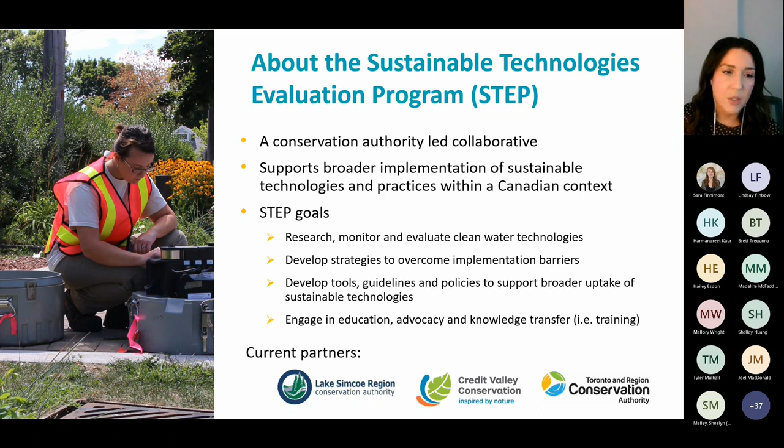We also develop tools. We have a treatment train tool for low impact development. We also have online tools like the Wiki, which is an online guide for all aspects of low impact development, design, maintenance, everything you need to know about low impact development. And we also develop guidelines and policies to support broader uptake. One of the primary things we do is education and training, knowledge transfer. So events like today are one of the primary focuses of the program, mobilizing the knowledge that we have gained through our research.

Okay, so today I'm going to be covering these key topics. I'm going to be focusing more on application of erosion sediment controls and specific topics like dewatering protocols and winter preparedness. We'll also be discussing legislation that's relevant and you need to know if you're involved in erosion sediment control or construction at all really, and designing ESC plans for construction projects.

If you're interested in more detail on the ESC fundamentals, like an overview of the erosion methods and sediment control methods and best practices, I also encourage you to check out the workshop that took place last week. I know Kawartha CA will be posting it online soon, so I can keep you posted on that and send out a notification when it is posted. But there's a full video, so if you need any of that background information and you didn't attend that session, I would encourage you to try that one as well.

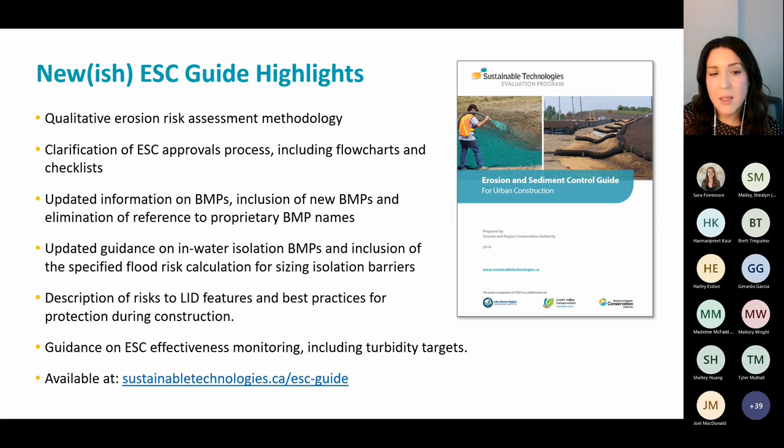Okay, so getting right in, we're going to dive into some information on pumping and dewatering best practices for construction projects. I think the important thing is that having dewatering protocols and plans in place will allow you to deal with your planned dewatering and any unforeseen dewatering activities, so that you always have a plan to mitigate sediment releases during those activities. The ESC plan should definitely include dewatering protocols that direct staff on how to handle active and passive pumping discharges.

Some of the common activities where you can anticipate needing pumping or dewatering would be sediment control pond dewatering to clean it out, or to facilitate any regrading or maintenance dredging of your sediment control ponds. On a multi-year construction project, you should definitely have to clean out your sediment control ponds at some point. It's not going to be okay to leave the sediment control pond without being cleaned for four years or whatever.

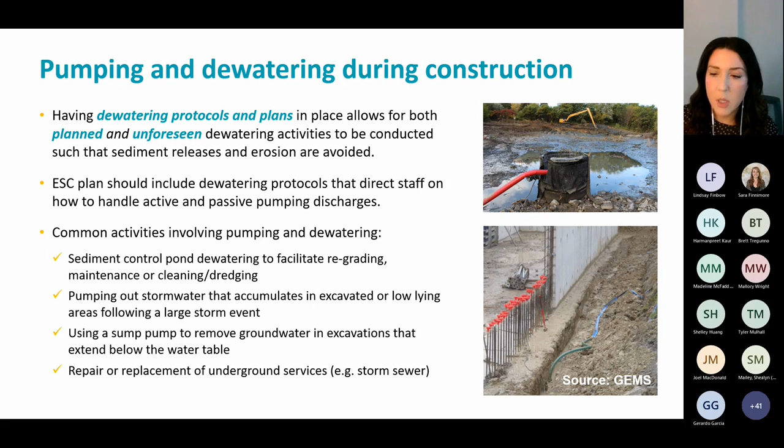Others are pumping out stormwater that accumulates in excavated or low-lying areas following a large event so that you can continue your work, using a sump pump to remove groundwater in excavations that extend below the water table, and repairing or replacing any underground services. Those are some of the most common activities. There are a lot of important considerations to think about when you're deciding on your protocol and making your plan. One thing you want to think about is your allowable water movement rates specified in your permits.

So, for example, a permit to take water or an EASR, Environmental Activity and Sector Registry, registration might be required when you're taking more than 50,000 liters of water in a day from a surface or groundwater system. But where pumped water is being discharged to a municipal sewer, for example, discharge permits are also typically required.

And while specific permits are going to vary, like you're not going to have the same requirements from municipality to municipality, they do typically include a maximum allowable discharge rate. Also, you want to consider the receiving water system and the standards of that system. So water that's discharged directly into a municipal sewer, either storm or sanitary, is usually subject to the municipality's sewer use bylaw, locally here in the GTA.

The sewer use bylaw specifies specific contaminant limits. Some of them are actually quite strict. So when you're dewatering, you have to abide by those limits. That's what you have to understand before you're going to be pumping water, whether you're meeting those criteria for the discharge to the sewer.

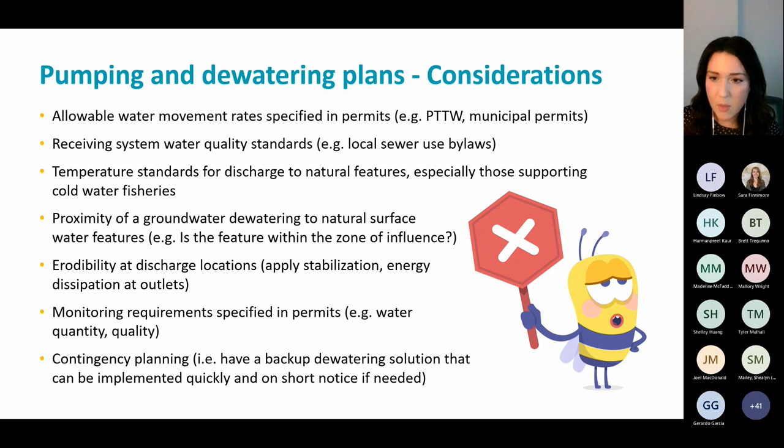So having that information on hand, having materials on hand to replace when something's wrong, all these are a really important part of your contingency plan, because a lot of times something will go wrong. On construction projects it's pretty common, and just having that contingency in place demonstrates your due diligence in mitigating sediment releases.

So what happens is you're kind of slowing water down by going through the bag and sediment will fall out. There's some filtration effect, but in general, it's actually the fact that you're just slowing the water down. You're also dispersing the flow over a much larger area, not having a concentrated pump outlet anymore. So that's really beneficial there.

So you can incorporate them in something like a ditch configuration, which is pretty popular because it's passive, meaning once you discharge it from your pump hose, it just flows through the ditch into its eventual destination. And so that's one common way to apply polymers if you want to speed up how quickly water is going to be clarified.

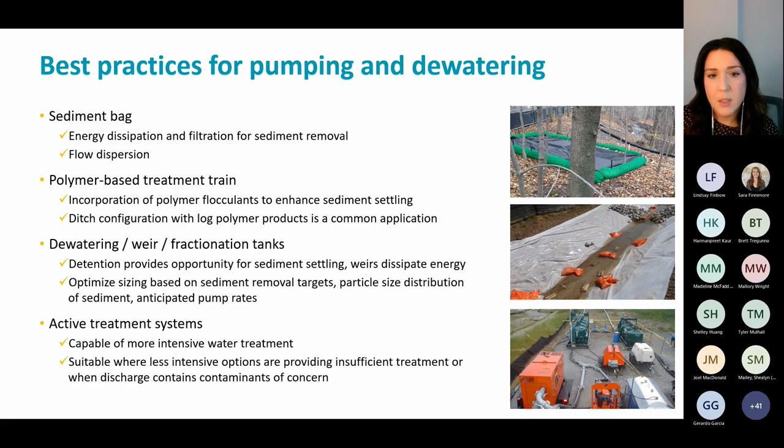But yeah, as you can see, there's different containers that house different parts of the treatment train, as you can see down below, and then you can even check the water at the end and just see it pouring out and see how clean it is, and test it even. So that's something that's available.

Going into a little bit more about sediment dewatering bags. These are composed of geotextile material. They remove suspended sediment from turbid construction site discharges.

It's always important to put the bag on a flat, stabilized area. Grass, if you can, but stable grass, not brand new grass, and stone lined is also a good option. Sometimes I'll put a wood pallet underneath just to make it easier to lift off after and give it the ability to drain below so it's not sitting flat on the ground.

At least 30 meters away from the receiving water system. It's always better to use a dewatering treatment train approach, where you include more barriers around it, ideally a silt sock barrier, providing multiple levels of treatment around the bag so you're getting the maximum amount of treatment. The water would be pumped into the center, into the bag, and then flow out around the bag to the perimeter, to a silt sock, and then beyond.

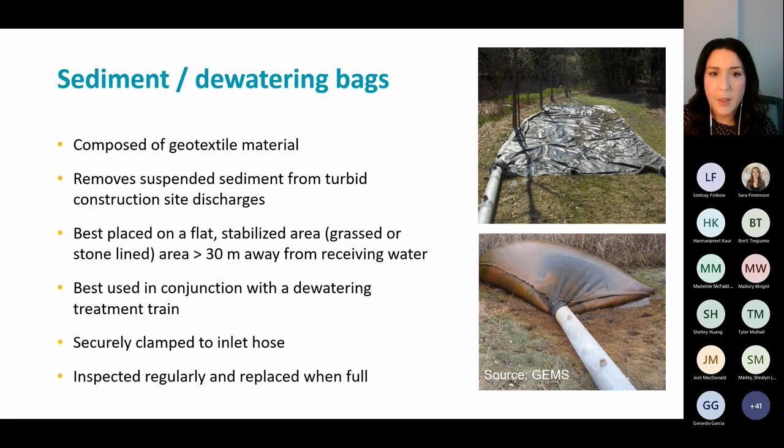You always want to make sure it's securely clamped to the inlet hose and is inspected regularly, and replaced when full. That's really important. Inspecting those is important because if that goes wrong, and it can go wrong, it becomes a big problem, and a lot of sediment releases can happen that way.

Okay, so this is the dewatering treatment train I was trying to describe earlier. Bear with me, I'm going to try to look at this a little closer.

This just illustrates that you can apply something like this in normal and frozen conditions. For normal conditions, you can use the sediment dewatering bag in the center, and you want to overlay the area with filter fabric. There's filter fabric underneath the geotextile bag, but over top of the staked-in filter socks. They placed it on a wood pallet skid just to make it easier for water to drain and also for it to be taken away after. This also provides, they secure the geotextile fabric with sandbags, giving you a multi-level, multi-barrier approach, enhancing the treatment as much as you can with measures that are relatively simple to put on site.

If you have frozen conditions, you can just pump the water directly into the center of this area instead of into a bag, and then put a second perimeter of silt socks to enhance the amount of treatment and settling you're going to get from the water being pumped in there. So that's a winter option, and since there's often not a lot of winter options, you always want to take advantage of the ones you have.

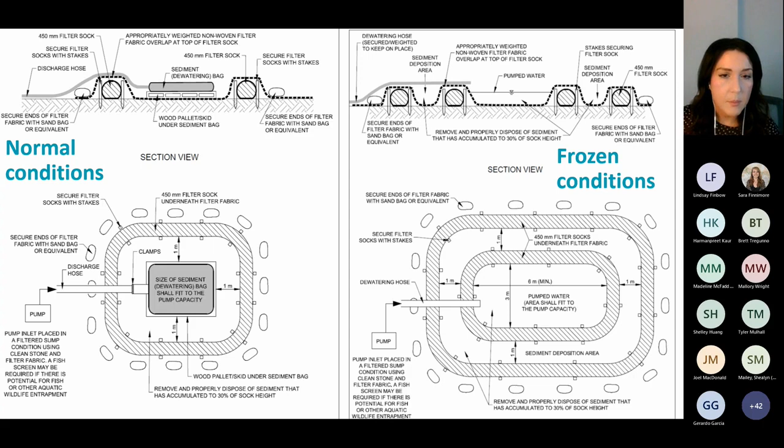Speaking of winter options, we're going to talk a little bit now about winter preparedness, which I know is a topic that can be really challenging. When you talk about construction sites during the winter, there's really not a high potential for erosion when it's frozen, but when there's a thaw event followed by an intense rainfall, and you have unstable ground conditions caused by snowmelt or melting frost, that's when you have the highest potential for erosion. Spring, after the thaw and after a lot of snow melts, is when you see the highest incidences of sediment releases and spills from construction projects.

When you have mild winter temperatures and rains, the ground isn't stable, and there are many challenges with installing sediment and erosion controls when you're trying to put them in during the winter. That just exacerbates the problem, and so there needs to be a different approach to solutions.

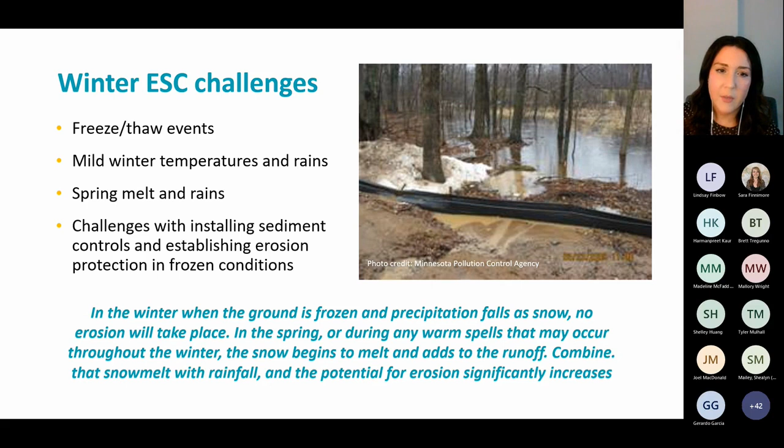This illustrates what happens with the soil. Frozen ground is generally erosion resistant, but soils with high moisture content are subject to heaving and freezing action, and they're easily eroded upon thawing. When you alternate the freezing and thawing cycle, it creates pressure which lifts the soil up out of the ground, and the downward pressure damages the soil by compacting it, while the upward pressure creates frost heave, damaging the soil structure, breaking down soil bonds, and reducing aeration, creating a poor drainage condition in the soil.

That frost heave cycle occurs mostly in early spring, sometimes late fall, when you have cold temperatures and abundant soil moisture present—that's when you can see it start to happen. Heaves can happen in any type of soil, but soils that retain a lot of moisture, like silt, loam, and clay, are the most prone to heaving.

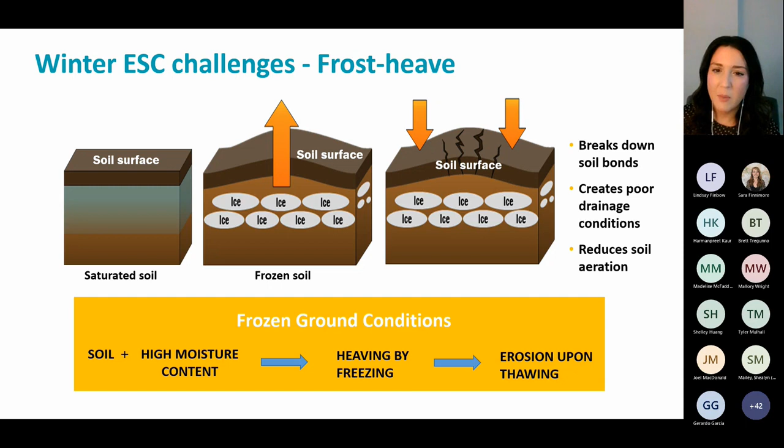So, I mean, this is the problem here. We're kind of focusing on the problem, and we're going to start talking about solutions, but your ESC toolbox is diminished in the winter because of the conditions that you're faced with.

When you're talking about implementing something during the winter season when the ground's frozen, these are some of the challenges. With vegetative ground cover, you can't establish it outside of the growing season, and it's automatically the most effective erosion control that's not available.

Hydro seeding is challenging because stabilizers are not as effective in cold conditions, and you're going to have poor growth over the winter. When you're talking about diversion structures like cutoff swales, it's not as easy to build anything like that when the ground is frozen.

Also, sediment basins are hard to install in frozen ground, and they can also be overwhelmed by spring melt, even if you have one in place already. So you can't just rely solely on that as your only BMP and not expect that it may be overwhelmed by the spring melt flows that you're going to experience.

Silt fence, again, because it's trenched in, is hard to install and can't really be installed in frozen ground. And it can often fail during spring melt if it's not reinforced well, not bolstered well, and doesn't have multiple barriers in place.

With erosion blankets, you can't really install them well on frozen ground, and improper installations that aren't keyed in will slip away in those melt flows. With grass-lined swales, again, installation on frozen ground is difficult.

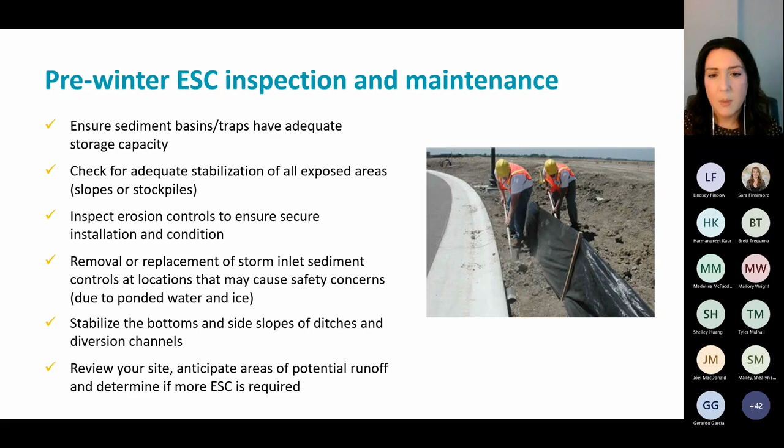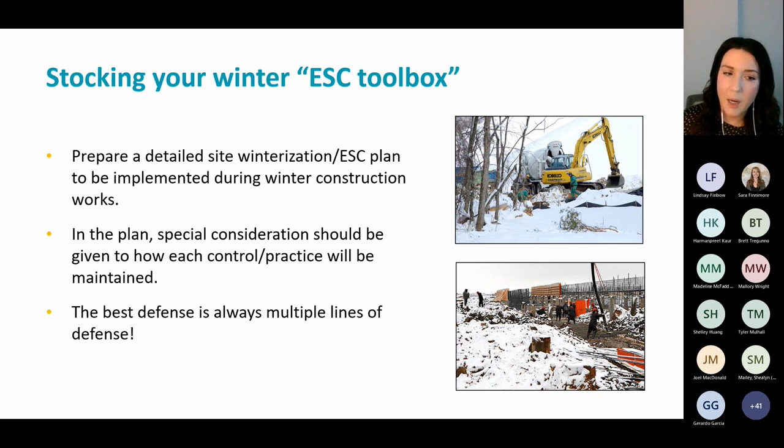When you want to go back and start stocking your toolbox, start by preparing detailed site winterization plans. Look at what strategies will work for you, and prepare a plan that's going to be implemented during winter construction works. In the plan, give special consideration to how each control or practice will be maintained throughout the winter. It's not just something you leave if you're not doing active construction. Remember, your best defense is always multiple lines of defense, also known as a multi-barrier approach, where you have multiple controls in sequence, so if one fails there's always a backup, giving you redundancy.

When you consider stocking your ESC toolbox, all ESC measures that can be installed should be installed. Silt fences and other practices requiring earth disturbance must be installed prior to frozen ground. Maintain adequate buffer width from perimeter controls and large access points. Have a snow management plan that shows snow pile locations downstream of exposed soil areas and notes that ESC measures should be cleared in preparation for inspections and maintenance. Drainage structures should be kept free of snow and ice dams. So there's a lot to consider when you're just restocking.

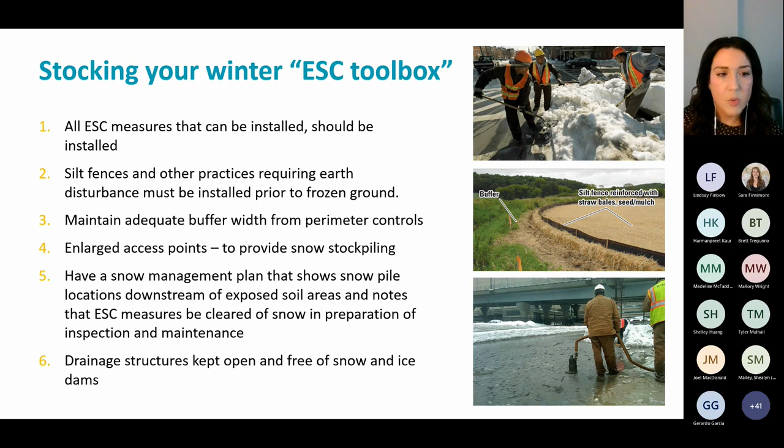There are a few more options. Limit the exposed area to what work can occur within 15 days and that can be mulched within 1 day prior to any snow event. Mulch applied for stabilization should be applied at double the standard rate in winter. If a delay is anticipated in finishing slopes, all exposed areas should be covered in mulch, like a rolled erosion control product such as a blanket, combined depending on slope length and gradient. You could also break up the slope using flow interrupters like silt socks, silt fence, or wattles along the slope to interrupt the flow and reduce erosivity, and also consider slope drains.

Again, multiple lines of defense are always the best way to go in this case. If the slopes are finished, you can cover them with an erosion control blanket that can be seeded through the spring, assuming you cannot establish permanent stabilization at that time. But the best ESC measure known and available is final stabilization, or permanent stabilization.

You also want to consider choosing more effective winter-specific erosion controls, not just the typical measures we always see talked about. For example, you might want to use a mulch berm at the perimeter rather than a silt fence, because the berm can be constructed on top of frozen ground without compromising its effectiveness, whereas you can't properly install a silt fence in frozen ground. Or if you do a winter installation of silt fence, it's not as resilient as a trenched-in silt fence.

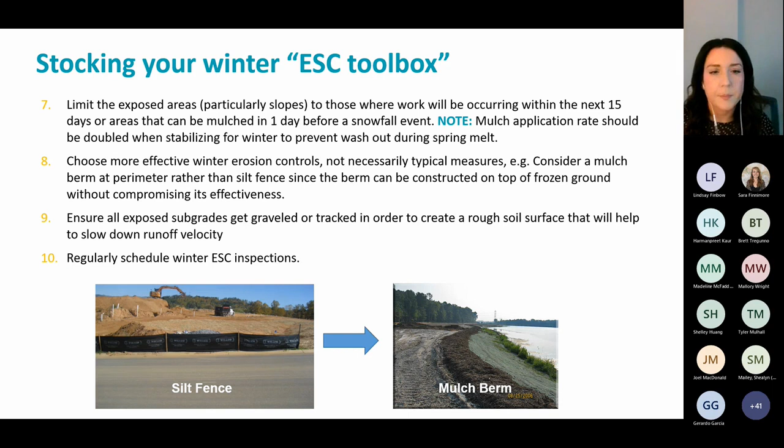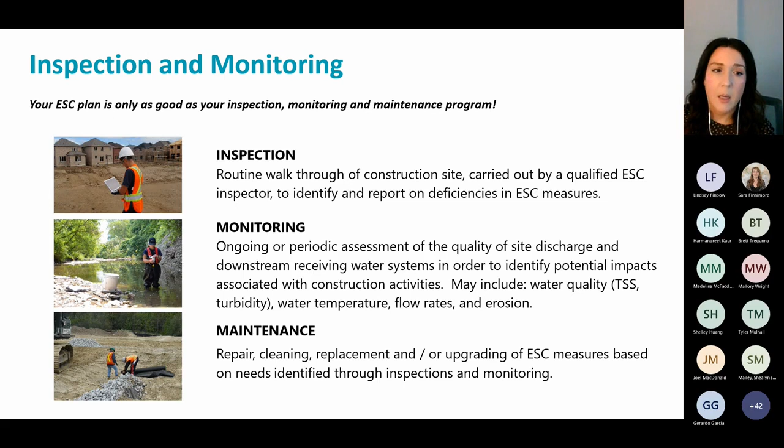So something to consider. And maintenance is just mostly sediment removal, repairing ESCs, adding, upgrading, replacing as needed to make sure that it continues to be the level of protection you designed.

For ESC inspections, the goal is to regularly assess the effectiveness of individual ESCs and your overall ESC plan. You also want your inspection to identify the need for maintenance - for example, sediment removal and repairs. You want to identify areas where ESCs should be replaced or augmented due to the fact that you see repeated failures.

I think also one thing you'll see on inspection reports, and one thing I've seen that's been really good in the past, is tracking just how many weeks this has not been functioning properly. So like, it's been 3 weeks, this still hasn't been fixed. Identifying that you've said this before - this is the third week I'm identifying this problem. That's something important to track.

Pictures, locations of where these impaired areas are, all important to include in your inspection report.

And beyond the condition and functionality of the controls, in an effective inspection you want to do ongoing assessment of the adjacent natural features, and actually look to see if you're having an impact on what the feature looks like, tracking over time whether it looks like you're having some sort of negative impact on the feature. So not just stopping at your site perimeter, but where your discharge points are into other private properties or receiving natural spaces - you want to look at those areas too and track that as part of your inspection.

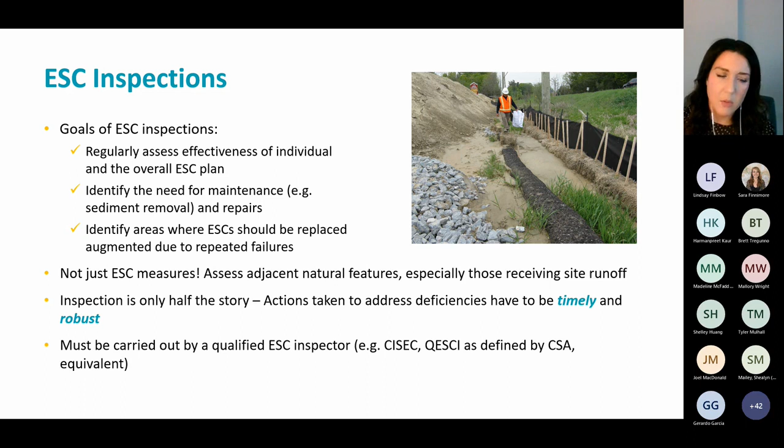So how often should you inspect the site? You want to do a pre-construction inspection to verify the erosion sediment controls are installed based on the approved plan. And then once construction begins, the inspection should occur on a weekly basis during active construction. You want to do it before and after significant rainfall events.

You want to do it after significant snowmelt events, after any extreme weather, like, for example, a windstorm that could have damaged some of your controls, particularly silt fence. You want to do it daily during an extended rainy or snowmelt period, and monthly if the site's inactive. So if it's greater than 30 days, you just go on a monthly basis if none of those other conditions are present. If there's a spill event, you want to go during or immediately following that.

Occasionally during an event, if it becomes necessary to see how water is moving through your site, that's a very smart thing to do if you have the capacity and the budget to do that, just to visit the site during an event just to see how water is moving and not just the aftermath where you see something's been damaged, but I don't know how this happened and where the water flowed to get here and how it all happened. So during an event, if it's safe to do so and within budget and possible.

You want to inspect before winter shutdown to ensure the site is ready for freezing conditions and thaws. And at the end of construction to confirm that you've achieved at least 80% effective stabilization on your site.

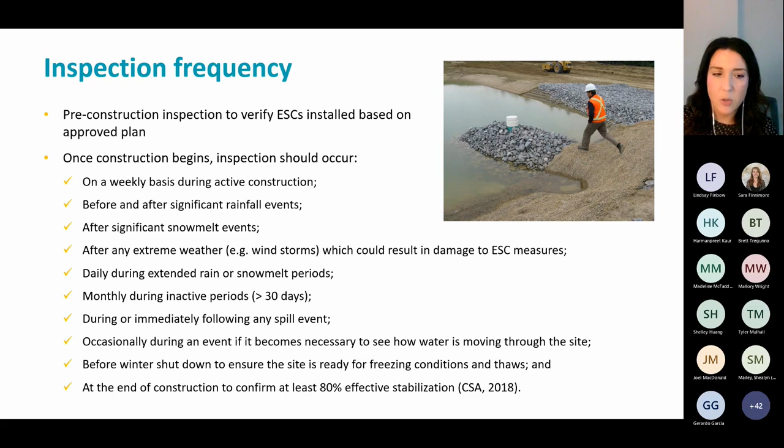So for ESC performance monitoring, this is the monitoring of site discharges and/or downstream water quality, which can help you understand whether the controls are working to actually mitigate environmental impacts. Turbidity is a parameter that's often measured on construction sites to assess ESC effectiveness, and it's used to serve as a proxy for total suspended solids.

So turbidity is an optical property. It's the cloudiness of the water. So it's not exactly just sediment. It can be cloudy for other reasons. But in practice, the water turbidity is often measured and used as a proxy for TSS, which is the total amount of actual suspended solids, since the turbidity can be measured on site in real time with something handheld or a station that's permanently in place, something like a YSI meter.

And for this reason, because duration of exposure to elevated turbidity is also an important factor when you consider whether that's going to have a negative impact on ecosystems, you want to be able to get a number right on site. And so the receiving water and effluent targets that we put in the erosion and sediment control guide are turbidity targets for that reason, because you can't measure TSS on site, and so you can't get duration of exposure and on-site real-time information as easily through that process. You have to send it to a lab.

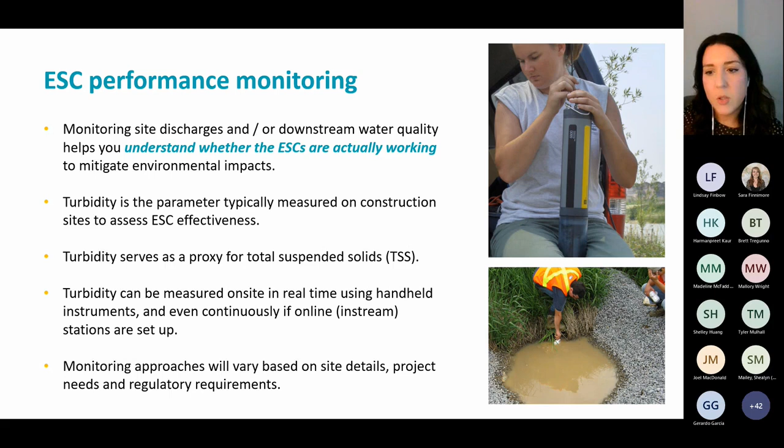And your monitoring approaches are definitely going to vary based on your site details, where you can monitor, what the project needs are based on what you're actually doing, what kind of contaminants could be present, what are your regulatory requirements, sensitive areas nearby. There's so many things to consider. So here are some of the site-specific considerations. You want to look at erosion risk and where you have high potential for erosion. You want to do more intensive monitoring for high-risk erosion sites.

When you look at your receiving water system, for example, are you going to a natural feature or the sewer system? And what are the thresholds that you're required to meet in either of those instances? Also, is the low water level deep enough to even keep a turbidimeter submerged if you had an online station? So that's something you may not be able to do if you don't have enough water. Is the receiver even accessible? Is it too far from the construction site? Is it going to be physically possible and safe for you to do that?

Is there a presence of any species at risk or protected species that are downstream of your site? Are you subject to any of those kind of approvals, permissions, regulatory requirements that are tied to those types of species? You might need more intensive, continuous monitoring on sites draining to species at risk habitat, and it's really usually determined by the regulatory body administering the legislation.

You also want to consider the type and location of discharge points. So is it easy to get to the equipment to install and to download? And you have to look at safety considerations. Also cost considerations. So if you were to monitor pond effluent, if you chose that was the way you wanted to go, like I'm going to look at effluent from my sediment control ponds because a lot of my flows are going through ponds. That's just how my site is set up.

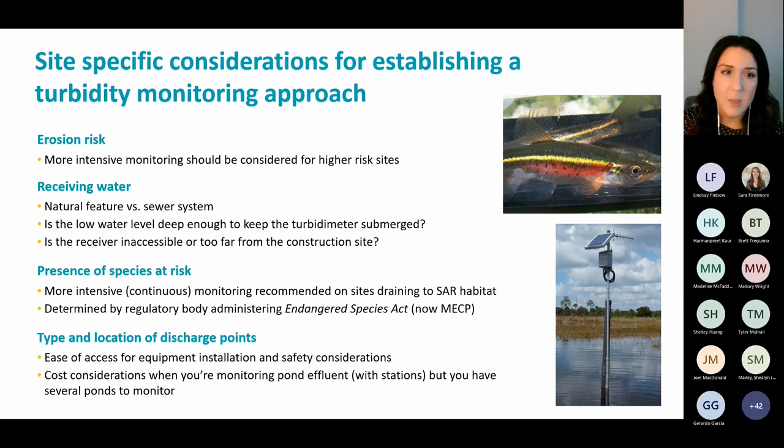Okay. I did see a few questions. So before I get into this part of the presentation that's going through some examples of problematic things that happen on erosion and sediment on construction sites, ESC failures, I'd like to maybe answer the two questions I think that came in.

Yes. So the first is actually not technically a question, but if there are species at risk, inspections may need to be conducted daily during wildlife active seasons if it's required by MNRF or MECP. And so the second, are you going to be speaking about the fines and penalties that you know of that are being applied to situations where ESC plans have failed or have not been followed?

There is some more information. I'm not specifically speaking about fines and penalties in a specific way, like this is exactly the total max amount that can be levied for each violation under those different acts. I think I put that stuff in the ESC guide where it specifically tells you, I think, the maximum penalties that can be levied for different violations.

And I don't necessarily have a lot of information specifically, even though I've spoken to our enforcement here and there. I only have one example in my mind where there was a really significant fine levied, and it was in the media. It was specifically related to a solar farm and repeated instances of exceedances, really poor erosion control. And they were fined heavily. If you guys want, I can find that example and send it out after. The details are escaping me right now, but that was one of the most recent.

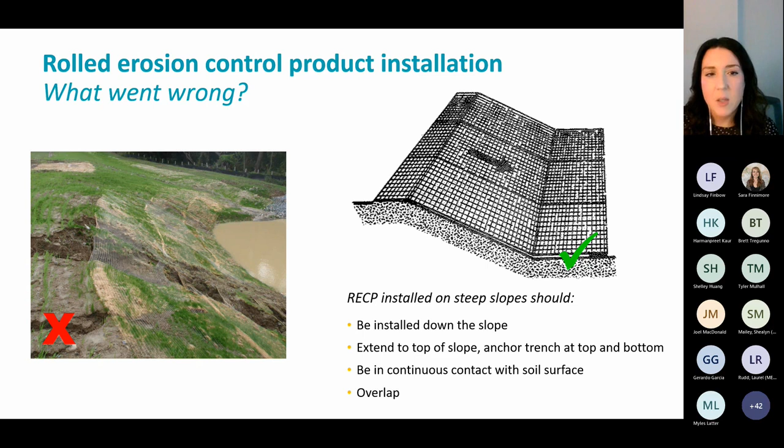But it also seems like this slope could have benefited from maybe a slope drain. It doesn't seem like the seed was established enough to receive the flows going down the slope. So there's a few things that could have been improved. And the unfortunate thing is an investment has been made here and money has been spent, but in the end it's still not working very well. So it's kind of wasted effort to some extent. So yeah, proper installation is really important in that case.

Another example of a rolled erosion control product installed for a cutoff swale. In this case, what went wrong here? Again, it's the installation and orientation of the lengths to some extent. The strip should be applied parallel to the direction of flow. And as you can see, it looks like either this is torn or the seam was in the middle. But it should be anchored at the top of the slope on both sides, be in continuous contact with the soil surface, and overlap again.

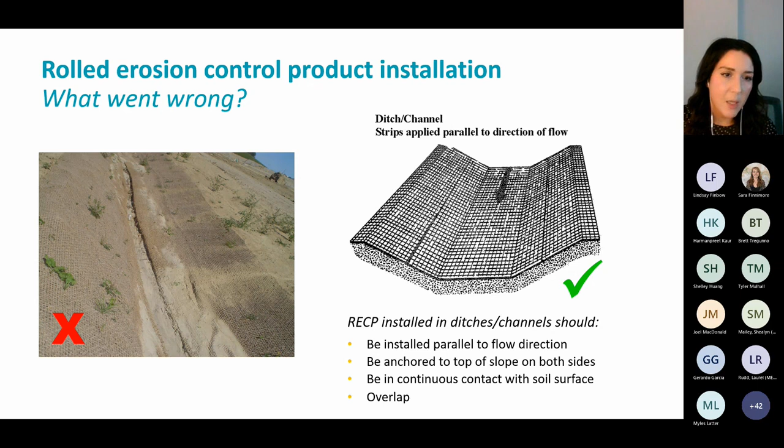It could have maybe benefited from some more ditch checks or something to slow down flows if this is too much. But it does seem like there's a rip in the middle there, and so it could have just been the way the blanket was installed that wasn't ideal in terms of orientation.

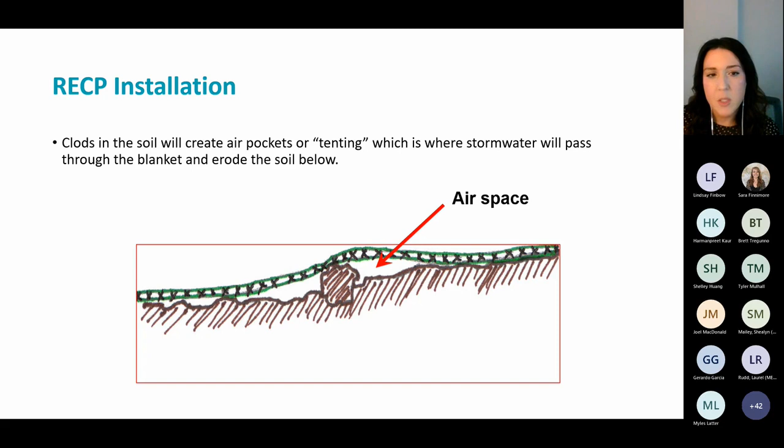You also want to consider when you're installing that clods in the soil will create air pockets, which is where stormwater goes through the blanket and erodes the soil below, and that's exactly what you don't want. You want really good ground contact. You don't want this kind of unprepared soil where there's clods that create a tenting effect. That's really bad for blankets. Here's an example of unprepared soil and how it just won't work, and water will be flowing underneath there.

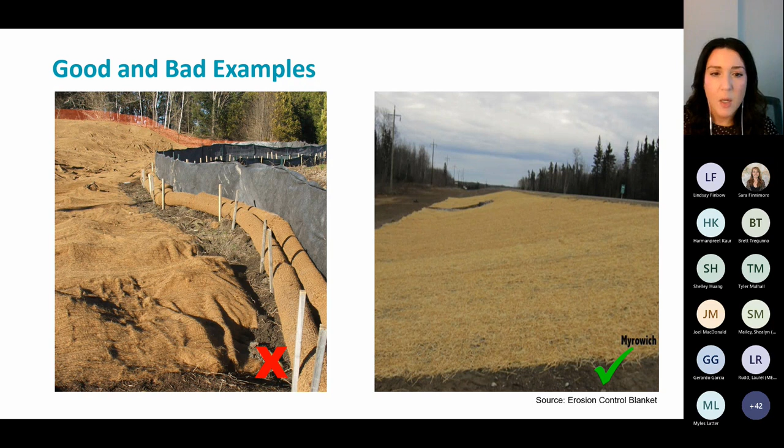Also, on the left, you'll see there's tenting. The slope is not really properly prepped. It doesn't appear to be properly anchored to the slope with staples. And on the right, you'll see really good ground contact, good soil prep, and ground contact is ideal there. And that's kind of what you want to be seeing when you're installing a product if you want it to work. If you spent all that money to purchase it, you want to make sure you take it all the way and install it properly as well.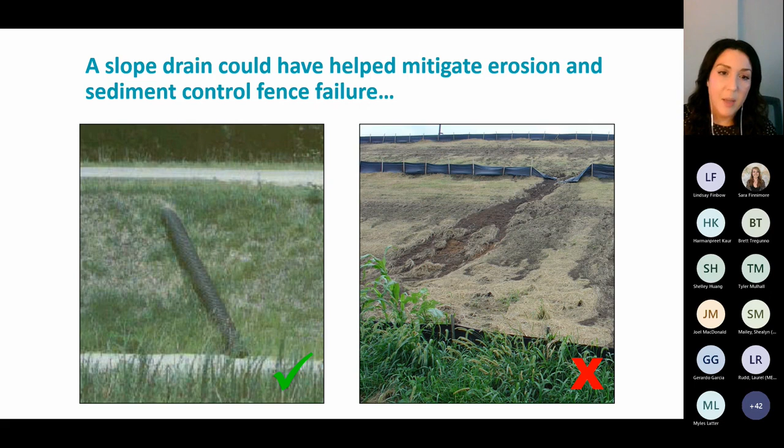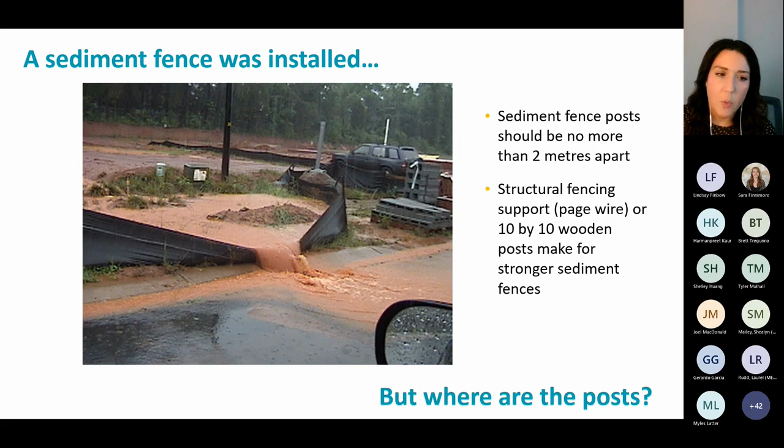Here's another example. Yes, there's a silt fence, sediment fence, but there are no posts, and you should always remember they should be no more than 2 meters apart. Structural fencing support like page wire or 10 by 10 wooden posts would make for a stronger sediment fence. That's a lot of water. It definitely needed to be stronger, but it doesn't even meet the minimum criteria where they're 2 meters apart. So there's a lot of problems on this particular one, but there's an obvious one. And always consider, if you do expect it to be potentially overcome, you can always bolster it. There are options to make it stronger.

With this sediment fence installation, I'm curious if anybody's aware of why it's not quite right. Let me know if there are any answers. I can't always see them in time. No J hook. Yeah. Thank you, Amber. Doesn't stop the flow. Yeah. Not terminated properly. Yeah. Doesn't stop the flow. Yeah. You need a J hook.

You always want to terminate. You want it to go up. The end runs of any perimeter control should extend up slope to prevent flow from going around. Not wide enough. J hook, likely not. Sorry, can you read them, Sarah? They disappear after a while for me.

So not wide enough. Could J hook, likely not the proper control. But whenever you don't J hook, it's easy for water to flank around the measure. So that's something to always keep in mind.

It's the same thing with any ways to handle staking when bedrock is close to or at the surface. So it's staking for a sediment control fence, I believe, if you can't get the stakes into the ground.

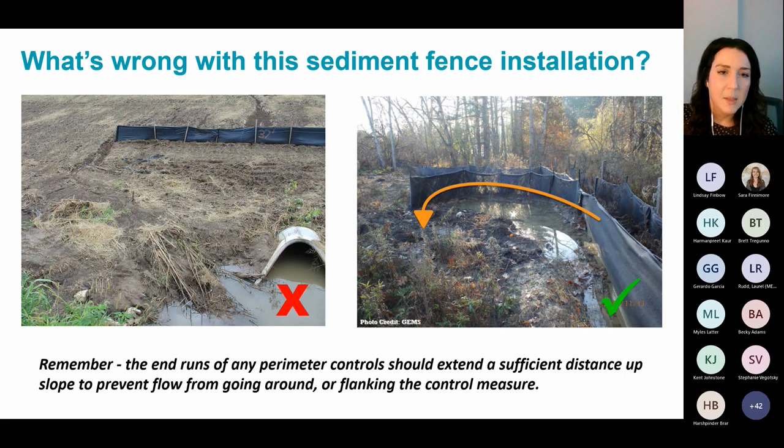Okay, moving on to outlet protection, just reinforcing the importance of stabilizing the flow path from where you are discharging water, because you can create a whole bunch of sediment entrainment and create a problem where you didn't otherwise have one, if you don't interrupt your flows and disperse them in some way. As you can see on the left, the flows are being interrupted at this outlet.

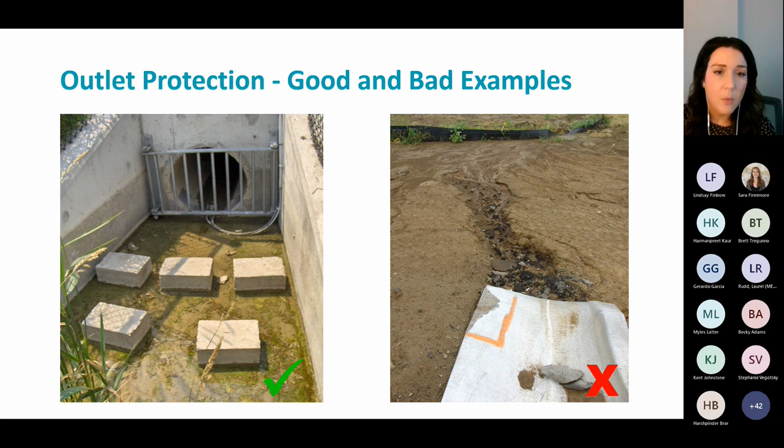At the culvert, I just want you to consider how you can prepare the ground surface to receive the expected flows, somehow slow down the flows, disperse them if you can. Anything you could do to reduce erosivity, you should be doing at outlets.

Looking at this, I thought, Goldilocks edition. When I saw this, the stone's too large. In this case, when you're doing a stabilized construction entrance mud mat, you want to consider the right stone sizes. You want to avoid using large diameter rock that can become lodged between the dual tires, and it can also become a liability issue. If it's too large, people may also want to avoid driving over it if it's too bumpy, and so you want to create some bounce.

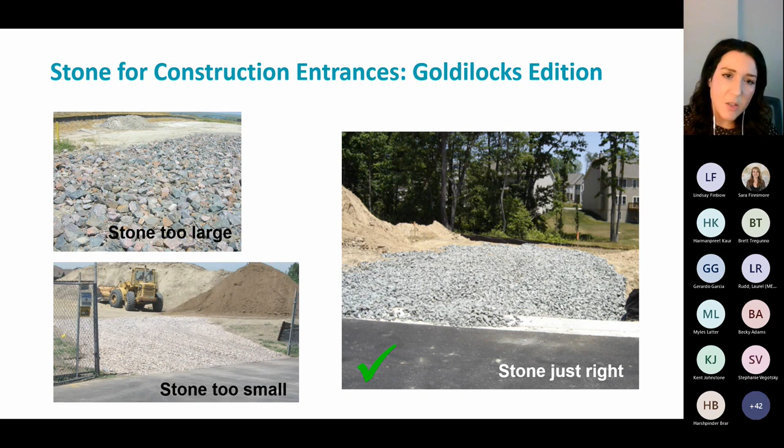You don't want the stone to be too small either, because smaller stone means less void space, and therefore less space where sediment can fall out and be contained in that stabilized entrance. If you have really small stone size, it's not going to give you the bump and bounce that causes sediment to dislodge. Also, if you have irregular stone sizes, some small and some large, it'll all just fill in, and again very few voids will be there, so you don't want that. You just want stone that's the right size, and that's something to consider when making these stable entrances.

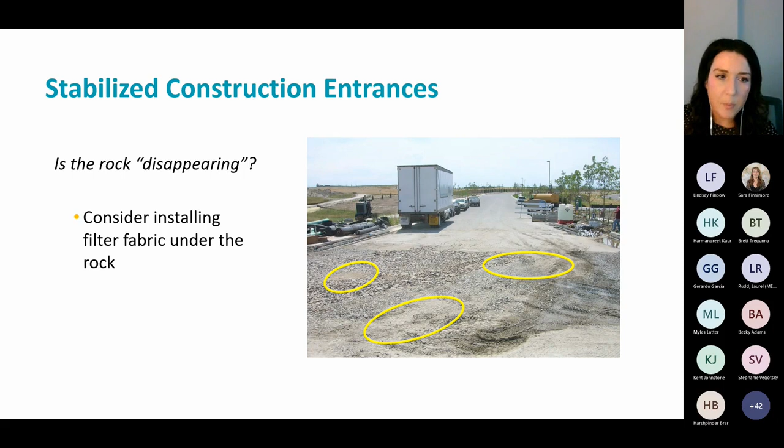Here's an example where it looks like, okay, is this rock disappearing? Really, this could indicate that it's just a stabilized entrance that's done its job and is covered in sediment, and just needs new stone placed or to be maintained. Or it could mean that the rock is just being forced into the soil because you didn't underlay it with geotextile fabric, and it's being pushed down into the soil below and disappearing. So I'd consider installing filter fabric under the rock as part of your mud mat stable entrances.

Here's another pretty obviously terrible example of a dewatering bag.

In this case, where it's used, you want to make sure it's in an appropriate location and that it's changed when required. This one doesn't even look like the hose is really attached, but you always want to ensure it is properly secured and water isn't only leaving from the seams.

If water is only leaving from the seams, it could be that the bag needs to be replaced because it should be leaving from the whole surface area. You want to ensure that underneath there's a stable pad that can receive those flows without causing erosion, so well stabilized with vegetation or stone or something like that. And the path from the bag to the receiver is also going to be stable enough to support whatever flows are going to be conveyed.

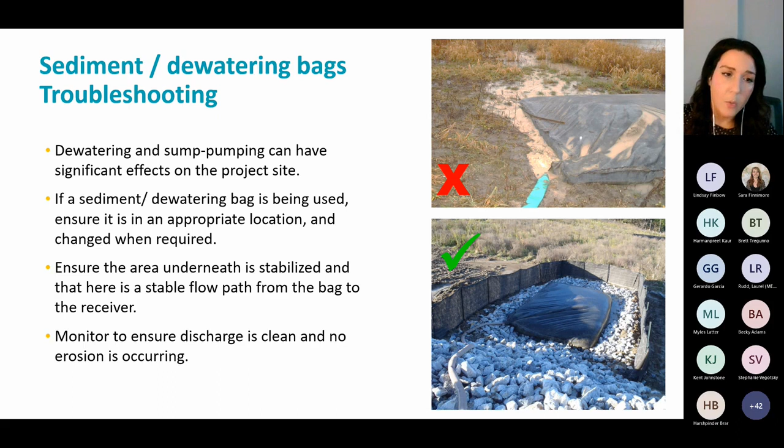You also want to monitor to ensure the discharge is clean and no erosion is occurring, and check on these regularly and replace as needed. The bottom example is a really good example: multi-barrier approach, flat area, stabilized bottom, and overall a really good example of using a sediment dewatering bag.

When you're looking at concrete washouts, you want to ensure that any slurry, concrete acid washes, and other waste are not entering storm drains. It's caustic and corrosive, this type of material, and it can harm aquatic organisms. So you don't want this in your drains, which outlet to your ponds and ultimately to receiving streams and lakes.

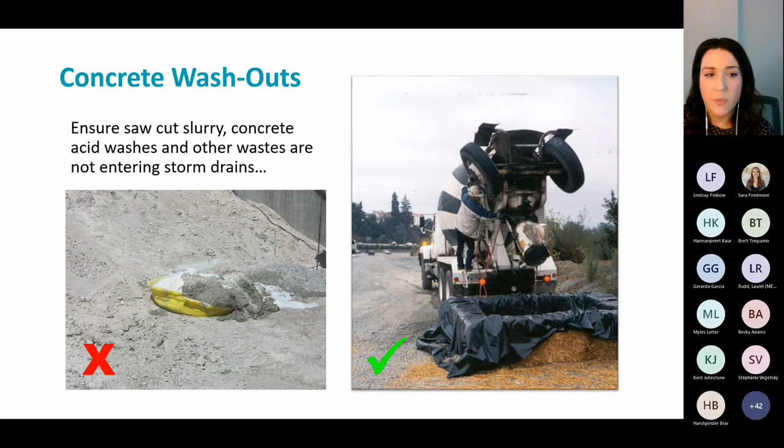You want to make sure you provide somewhere for trucks that aren't self-washing to wash out on site in a safe, contained area. You also want to make sure it's identified on the ESC plan, the company is aware of the location, and there's signage. Are the facilities adequate? Are they clearly identified? Is the washout material fully contained? And is it constructed with a vehicle tracking pad, almost like a stabilized entrance to that containment area?

So some things to consider, because it is something you don't want being released.

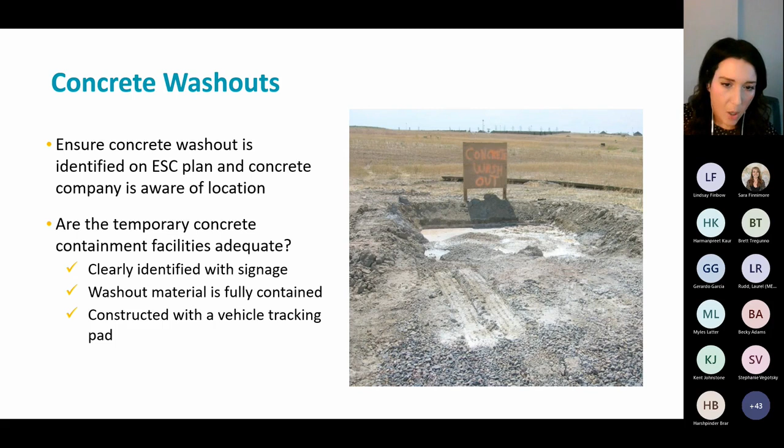Staking on bedrock means the fence can't be keyed in, so it can be an issue with regards to water and sediment controls. But the best example this person has seen is they had to use a fence for wildlife exclusion on Canadian Shield, and they ended up cutting the stake short, creating a tripod for support for the fence, and then gluing the fence to the rock. I would love to see a picture of that — that's very innovative. If there's any pictures, please send them to me, I would love to see that.

Here's a rock check dam, and I would love to hear from anybody in class about why it's a bad example of a rock check dam. There are also bad things about the picture overall, like it's not a stabilized swale, it's just bare soil. There are other problems here, but if you just specifically look at the rock check dam and how it should be created, and its dimensions, that's kind of the key to why it's not quite right.

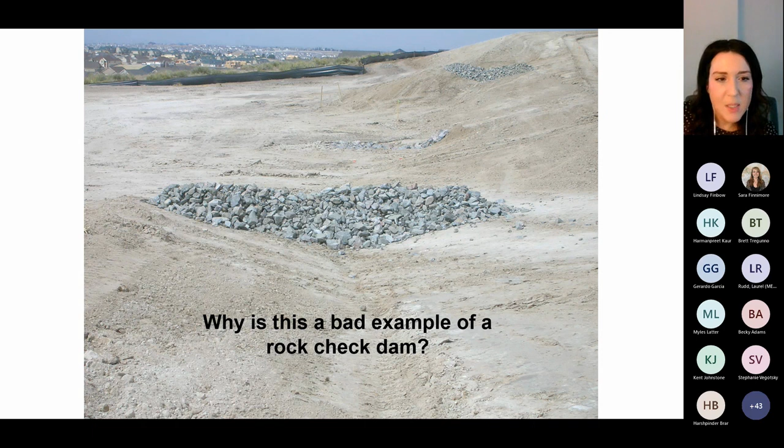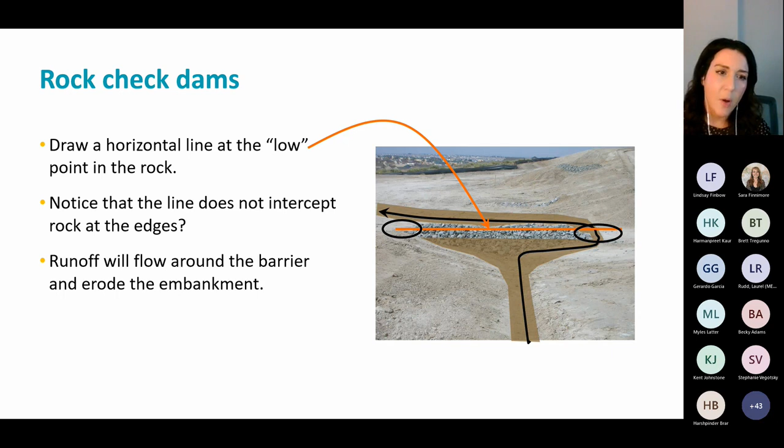I'll give everybody time. Okay — no depression in the middle for flow, yes. So if you look at... oh, my animation's not playing. Okay, this isn't working, but what's supposed to show in the picture? Oh, here it is. So if you draw a horizontal line at the low point in the rock, that's supposed to intercept the edges. Otherwise, that's going to be a place where all your water is going to flow, because it always finds the low point, and it's going to erode the embankment. So you want to consider that you're creating a depression and then extending that to the ends, and you should be able to see, if you draw a line to the low point, that it matches up with where the rock ends up at the sides of the embankment. Here, this is pretty clear, but what's wrong here?

It's the lack of anything at all - that's what's wrong. It's even the fact that this much sediment has been mobilized to this point, and whatever control would be here would have to actually handle this much sediment is already a problem. So there's an upstream problem for sure.

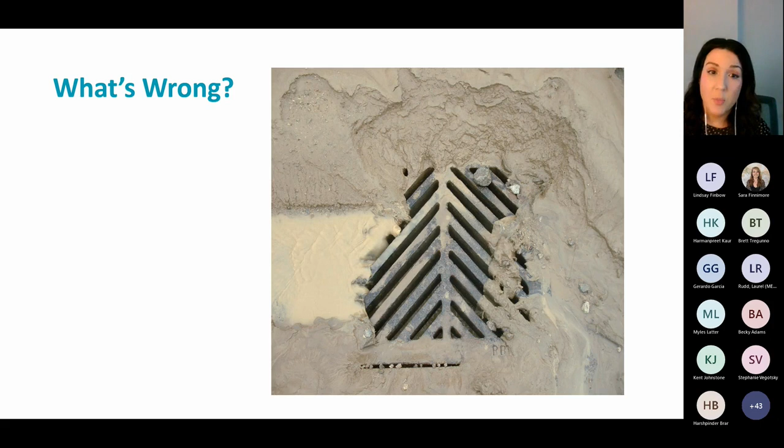But if you want to consider what can you do, because you've already had the problem there, there's a lot of storm drain inlet protection options out there that are better than just a piece of geotextile fabric underneath the grate. I don't even think that one is there, so that's even worse.

But definitely protect your storm drain inlets. Even though sediment control ponds exist, they're not like waste disposal or garbage dumps for all your sediment. You should mitigate sending sediment to those ponds as much as possible. They'll have to be cleaned frequently. If they're not cleaned, they're not going to work very well, and sediment's going to be discharged into the receiving water system. So minimize the amount of sediment that gets to your final sediment detention facility controls by doing things like this at storm drain inlets, and of course upstream.

But there's all kinds of different products on the market that can capture more sediment and not need to be maintained, and not just fail as easily as these options that are commonly used.

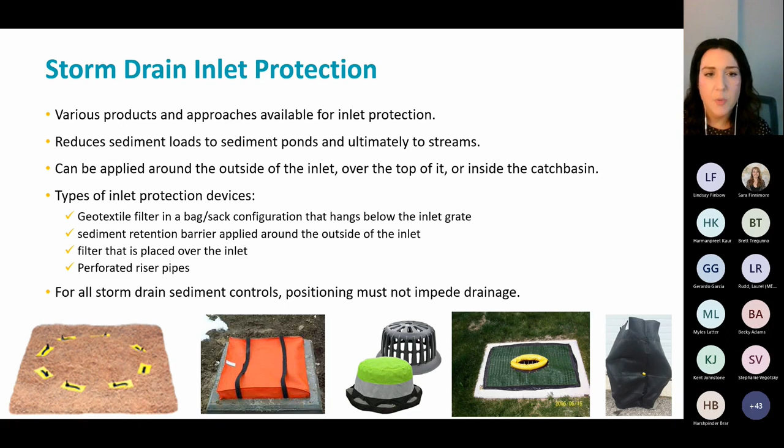Okay, so I'm going to pause there. Okay, sorry, there's a question. Can you read that out, Sara?

You mentioned in the last presentation that rock check dams should not be installed in water courses. Could they be installed in ditches that are not considered water courses? Yes, as long as they're officially not considered water courses, I would say so.

Okay, great. Does anyone else have any questions? Feel free to raise your hand or put it in the chat. So, okay, Brett.

Responding to the UV degradation - is there a general rule of thumb for replacement if left idle for too long? For example, a fence or silt sock fabric, blanket, netting, etc. If it's left idle for too long and it degrades with UV rays, like should it be removed? Is there a rule of thumb for replacement?

Okay. So I don't think, okay. Brett, can you use your mic and tell me what you mean? Sorry, can you elaborate? I'm a little confused. Hi Brett. Sure. Hello. Yeah, sure.

Of course, yeah. We've got a lot of construction sites where basically they put up the silt fence, for example, or perimeter controls, and then it just sits and sits, and then you come back to inspect, and you start to see holes in the fence, and you start to see some of the twine. If they've got some straw bales, it's starting to fray, and it's like, at what point in time should they just replace these? Because they've just sat too long in the sun.

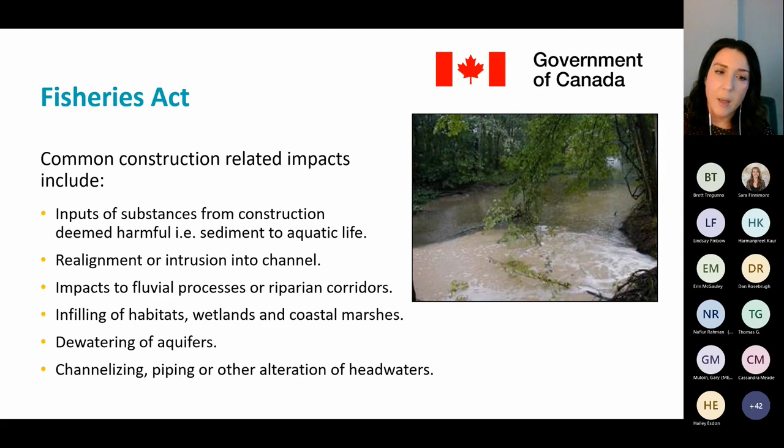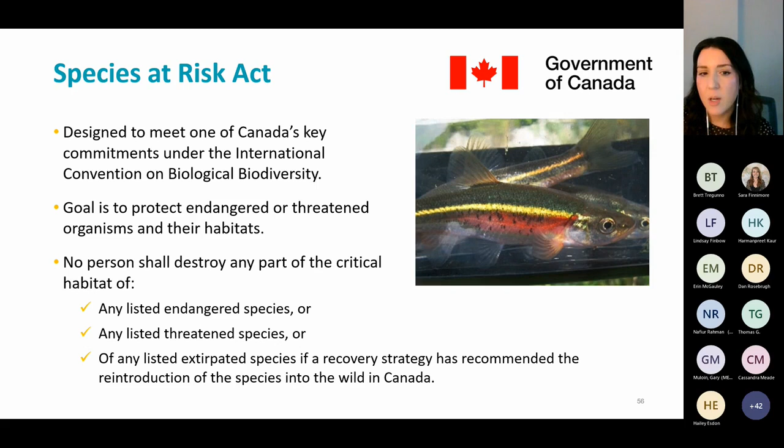Moving on to another key piece of federal legislation, the Species at Risk Act. This is the federal one; we also have a provincial one. It's designed to meet one of Canada's key commitments under the International Convention on Biological Diversity, and the goal is to protect endangered or threatened organisms and their habitats. Specifically, no person shall destroy any part of the critical habitat of any listed endangered or threatened species, or any listed extirpated species if there is a recovery strategy recommended for reintroducing that species into the wild in Canada.

Also, the Canadian Environmental Protection Act is relevant here. The goal of the renewed Canadian Environmental Protection Act is to contribute to sustainable development through pollution prevention. It respects pollution prevention, protection of the environment and human health, and protects the environment, human life and health from risks from toxic substances.

A substance is considered toxic if it enters or may enter the environment under conditions that have an immediate or long-term harmful effect on the environment or its biological diversity, if it constitutes a danger to the environment on which life depends, or constitutes a danger in Canada to human life or health. So pretty broad.

When a toxic substance is released into the environment, this is from Section 95, the person responsible must report the release. They have to take measures to prevent the release and mitigate any danger to the environment or public safety.

Moving on, we're going to look at a bunch of pieces of provincial legislation. A lot of them have relevance in this regard. These are the ones administered by MECP: the Ontario Water Resources Act, the Environmental Protection Act, the Endangered Species Act, and the Conservation Authorities Act. Administered by Municipal Affairs and Housing are the Municipal Act and Planning Act. Then there are agencies that enforce regulations and policies under some of these acts: local municipalities, upper and lower tier depending on the area, and conservation authorities also have a role.

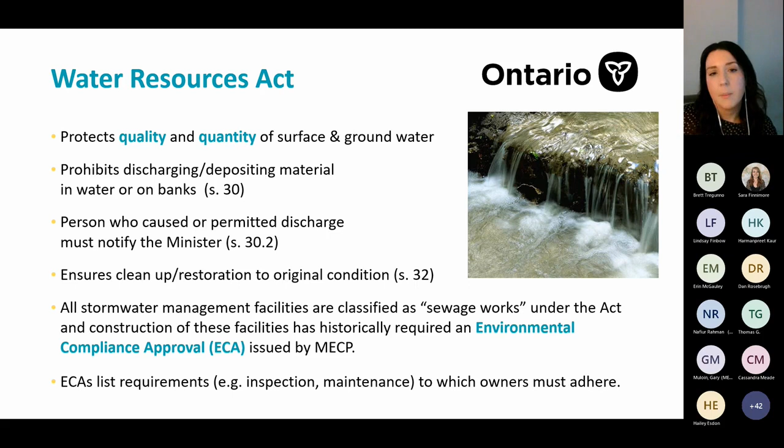There's been some recent changes to the ECA framework for stormwater management facilities. It's worth touching on now because we're talking about the Ontario Water Resources Act. The Consolidated Linear Infrastructure Permissions Framework is replacing the ECA process we've had to date, and it applies to low-risk routine stormwater management projects. It doesn't have to be ponds. You see their infiltration chambers, so any stormwater management facility.

And so municipalities that apply can be given a single blanket ECA, a system-wide ECA for all SWM works that happen in their municipality. And so the permissions would be associated with construction, modification, alteration of any SWM facility. And those responsibilities and permissions are passed on to the municipality to provide to people that are building these facilities.

The ministry is transferring these responsibilities to municipalities and providing them certain criteria and guidance to be adhered to as they provide these permissions. One of them is related to design, so design criteria for sanitary sewers. I won't say the whole thing, but that's the document that's available that came out in April 2022.

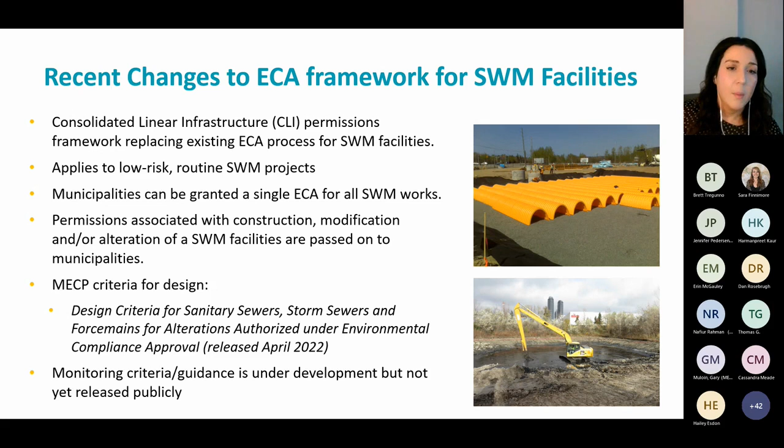And there will be monitoring criteria guidance that is under development, but not yet publicly released. And that is forthcoming soon, I think this year, but it's in the works still. And that's something that's supposed to guide municipalities as they start to assume this responsibility.

So moving on to the Environmental Protection Act, this is also relevant. It's a key legislation for environmental protection, and it grants the MECP broad powers to deal with discharges of contaminants. In this act, it's any solid, liquid, gas, odor, heat, sound, vibration, radiation, or combination of them, resulting directly or indirectly from human activities that causes or may cause an adverse effect. Very broad definition, but definitely could apply to sediment releases.

In Ontario, as I mentioned, we also have our own Endangered Species Act, even though we also have federal. The purpose of this act is to identify species at risk based on the best available scientific information we have, and that includes information obtained from community knowledge and Aboriginal traditional knowledge, to protect species that are at risk and their habitats, to promote the recovery of species that are at risk, and basically to promote stewardship activities to assist in the protection and recovery of those species.